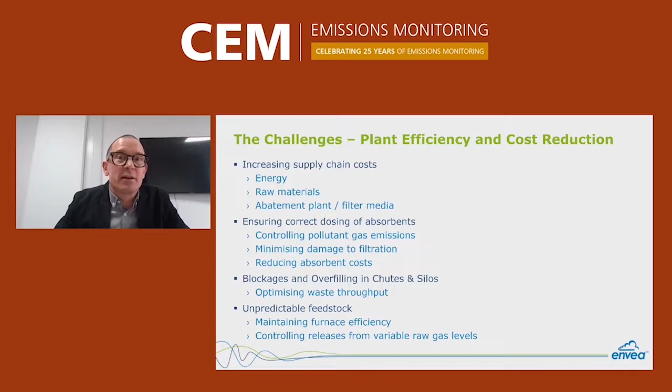And that includes materials used for the pollution control in the waste incineration sector, such as the sorbent materials that are used to help minimise some of the emissions, and filter media costs. And the routine challenges that the process operator faces, such as being able to ensure the efficient and smooth operation of the facility without any unwanted delays, such as blockages that add costs through direct labour, and also delays in production output, or energy output in this case. Next slide, please.

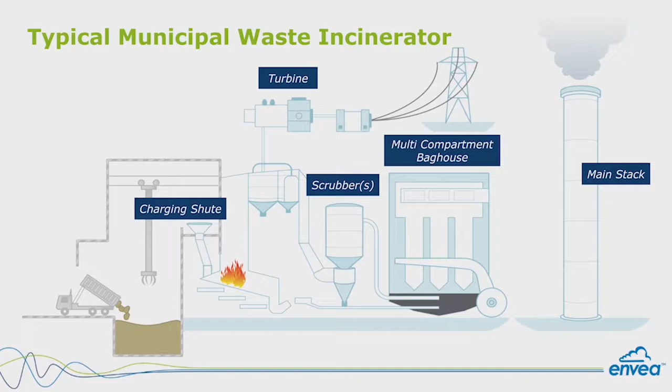To give a very basic overview of a waste incinerator, we have the waste coming in, the combustion process itself. This then drives the turbines to generate the electricity. And from the waste gases that are generated, there are numerous abatement techniques they use. These comprise various dry scrubbers, wet scrubbers, and ultimately the final emission, typically a fabric filter, a baghouse, which is used to get the emission limits right down to the very, very low levels that are required under the European BREF notes and BATC documents.

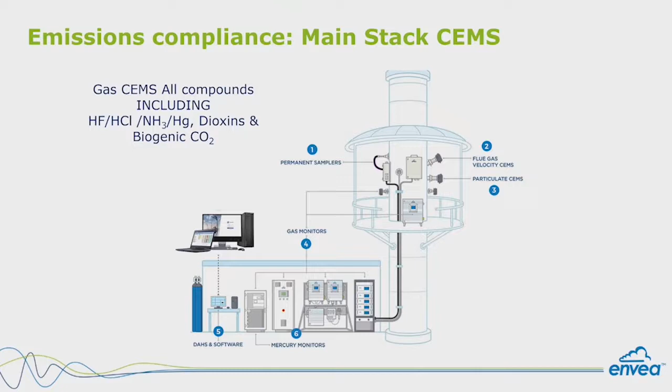Next slide, please. So when we look at the CEMS that are required, it'd be wonderful to go into detail about the complete range of emissions monitoring products that are required to demonstrate their legal compliance. Dust monitors, flow monitors, gas monitors, biogenic CO2 monitoring systems, now mercury, dioxins, and ultimately the need for appropriate software and data acquisition systems to be able to do the required reporting. That's just a simple overview of what's required on their routine environmental compliance side with regard to their stack emissions. Next slide, please.

But what I want to do here is not to focus on the emissions monitors themselves, but actually how we can introduce certain process monitoring tools to help achieve a better environmental outcome in terms of potentially the emission levels themselves, and also raw material costs. Next slide, please.

This is a very simple overview of just some of the products that we consider here. We can consider in terms of process monitoring to achieve certain efficiencies. We would not have the time in this short 15-minute session to be able to go into each of them in detail, but we can go from baghouse filter monitoring, level detection to ensure no blockages, flow detection, raw gas monitoring to ensure combustion control, and in-process gas monitoring as well.

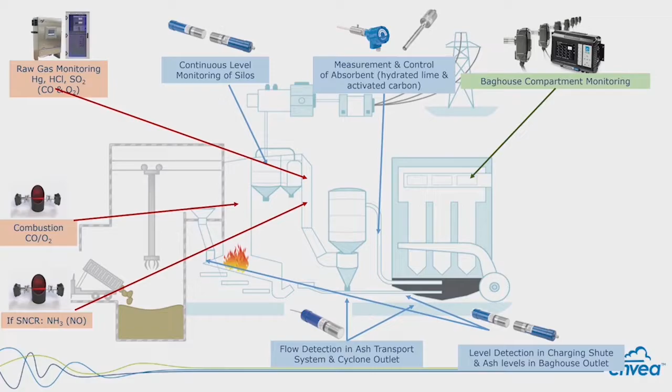But for the purposes of the case study, we can't look into all of those. So what I'd like to do, next slide please, is to focus on just two aspects here, using mercury monitoring, as it is obviously one of the most toxic pollutants that we see from waste incineration.

One of the key challenges that the process operator has here is the inherent variability of the feedstock, and certainly limited direct control that we can have over that as a feed material, as a fuel source. So what we're looking at doing here, in terms of trying to achieve process monitoring and environmentally beneficial outcomes, is to have monitoring of mercury within the raw gas, straight from the direct combustion, and also to be able to monitor and control the reagents that are used, specifically hydrated lime and activated carbon. Next slide, please.

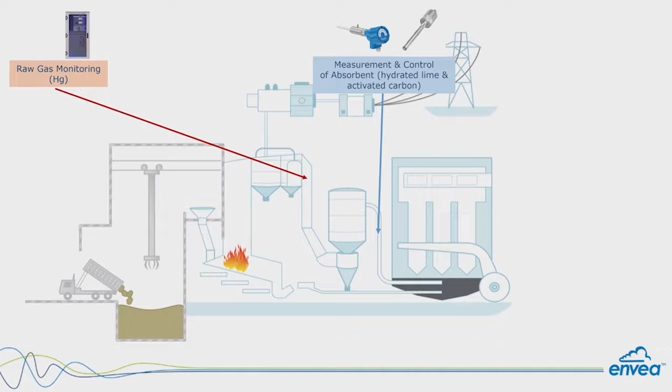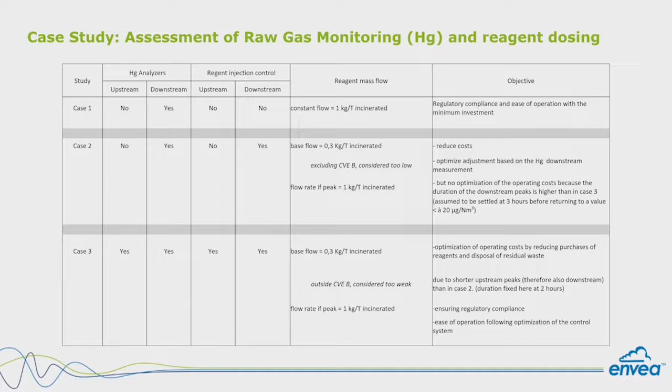So what we've got here is a number of different scenarios. This was a series of tests that were undertaken by my colleagues in France on one of their waste incineration customers. So in the first example, let's call it case one, this is just doing it in the basic way. The norm here is to have a constant stream of dosing applied to the emission stream, with no upstream monitoring whatsoever. Sorry, to go back, in the first case, we're just relying upon the mercury monitoring from the releases, with no reagent control, just a fixed rate.

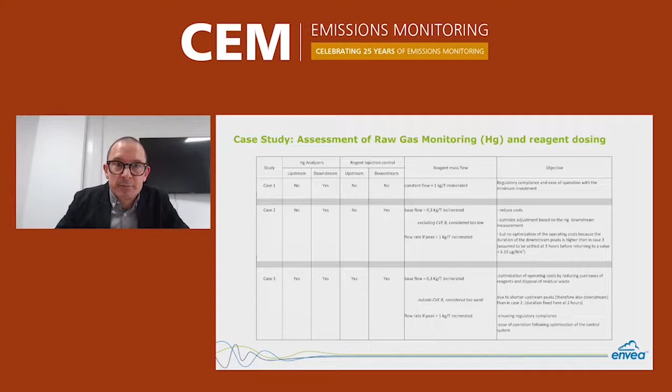So for the second example, we are actually introducing some reagent control in the dosing, but still only relying upon downstream monitoring of the mercury emissions. And then in the third example, we're actually introducing some raw gas monitoring for the mercury, and also upstream and downstream monitoring of the reagent control. So we have a variety of different scenarios here. Next slide, please.

So this is a quick overview of the basic data that's used in this calculation: standard operating terms, detail on how many emission peaks they typically expect to see a day, and the duration of those peaks. It's worth noting here that, unlike some of the gases that we're monitoring, the lag period for mercury is not a short spike that we see in the emissions. It's actually a tailing curve, and these can last several hours.

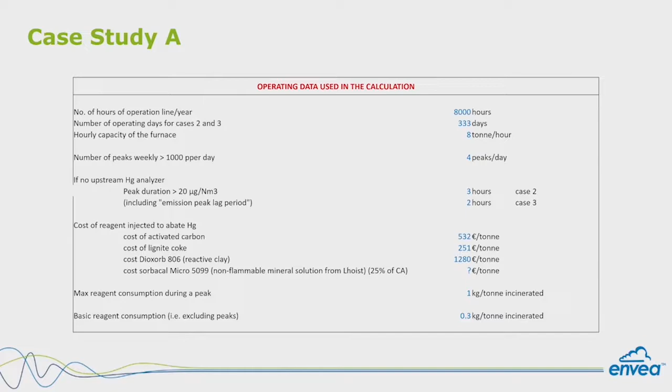And here we've got some indicative costs on the sorbents. Unfortunately, my colleagues were not able to get costs for each and every sorbent, but it gives us a starting point to be able to look at the outcomes from the different scenarios that we'll see. Next slide, please.

So here is the first set of data that we obtained. If we refer back to the cases mentioned, the first one is just a constant flow rate of the reagents with no upstream monitoring. And what we see here is an estimated annual cost of about 34,000 euros a year. It's actually potentially going to be higher these days, but this gives us a baseline for this case study example.

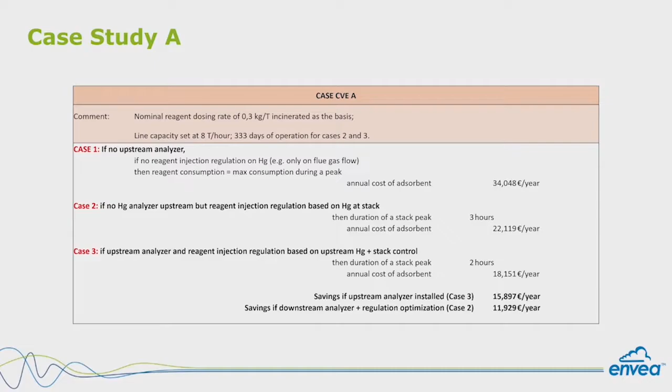So in the second example, when we start to control the reagent introduction based on the stack monitoring and trying to optimize it: when we see a peak, we can add more. When we don't see a peak, we can use less. So actually there, the duration of the peaks are typically lasting up to about 3 hours.

But actually by not applying the fixed rate and starting with a lower base rate, where we've decreased the background sorbent level by about a factor of 3, from 1 kilo per ton incinerated down to 0.3 kilos per ton incinerated, that alone, and upping the dosing only when we detect the peaks in the outputs, has decreased the sorbent cost to about 22,000 euros a year. So a significant saving has already been achieved there.

And then the third example, where we've actually got the raw gas monitoring to give us real-time data on what's directly coming out of the combustion process for the mercury itself, with the reagent control, again keeping that lower level of standard dosing, but increasing the dosing when we see the peaks. That's brought two benefits here.

It's actually decreasing the peaks: instead of them lasting 3 hours, they're now down to 2 hours. And also in turn decreasing the sorbent cost further down to 18,000 euros per year. So that gives us cost savings of between 11 and 15,000 euros a year by this approach in this example. Next slide, please.

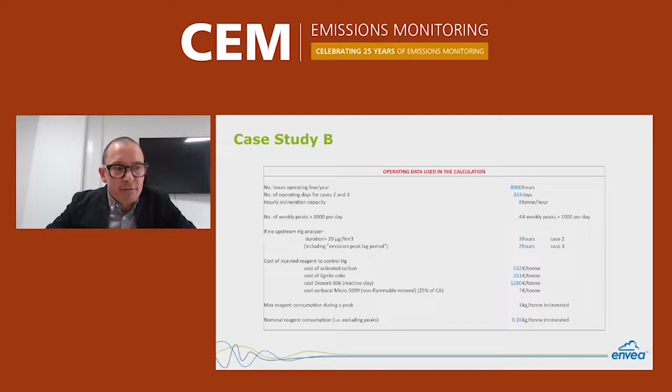In case study B, the key difference that we see, although there was a slight difference in the sorbent mix, the aim here was to decrease the baseline sorbent level down to 0.16 kilos per ton, kilos of sorbent material per ton of waste incinerated. Everything else is essentially the same. Next slide, please.

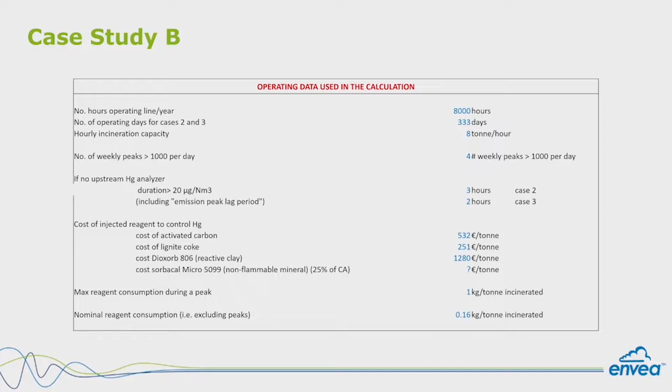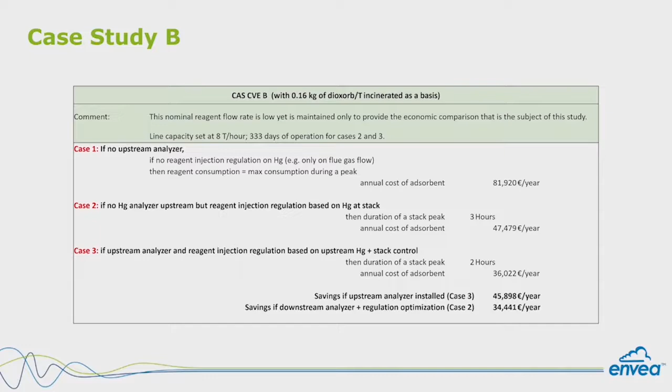So here, the cost of the sorbent, as I said, it's a different sorbent mix, but the baseline start point, with no upstream monitoring and no reagent dosing, in this example was 81,000 euros per year. But then when we move to case study 2, where we're introducing the reagent control, using the CEMS data, the emissions data, to increase the dosing, the peaks themselves are still lasting typically 3 hours, but we've almost halved the reagent costs by getting it down to 47,000 euros per year.

And then for the third and final example of the case study, the optimum, shall we say, where we have upstream the raw gas mercury monitoring, and also the upstream and downstream reagent control for the mercury monitoring. Again, the mercury peak duration is decreasing down to 2 hours typically. And the annual cost of the sorbent is decreased once again, down to 36,000 euros per year.

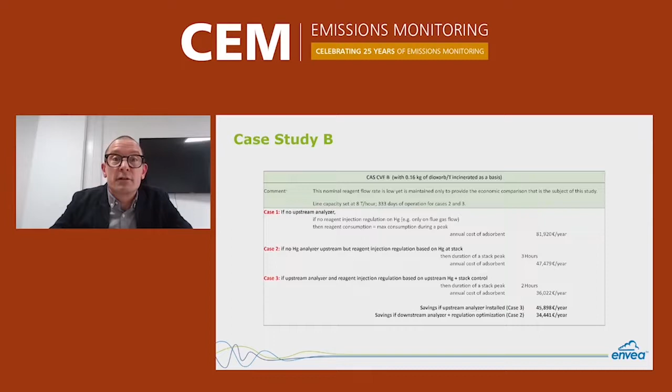So again, we're seeing a significant decrease in the sorbent cost, with the added benefit of actually decreasing the mercury emissions as well, certainly through the duration of the peak. So here, in this case study, the cost savings are between 34 and 45,000 euros per year. So, roughly halving it in round numbers. Next slide, please.

So just to conclude, there was a lot to try and capture in 15 minutes. It's a short time slot. For the waste incineration sector, the general guidance provided to achieve environmental compliance and process efficiency is through the BREF and the BATC documents, the last one introduced in 2019, as mentioned earlier. But in addition, we can focus upstream into the process and bring in further monitoring techniques, such as the raw gas monitoring and the dosing control.

And as we saw through these two case studies, there are several outcomes. We've got reduced sorbent costs, we've got better control of the emission peaks and keeping those down, which further adds to legislative compliance. These give real-time cost savings for the process operator, but also add to ethical stewardship. This is a very positive message the operator can give back to the local community, especially as this can be quite contentious in some areas.

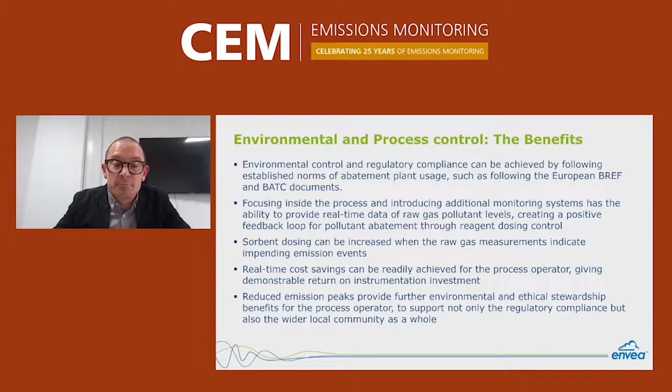So I thank you for your time. Last and final slide. There was a lot for me to get through in 15 minutes, but hopefully you got an insight as to how looking upstream with process monitoring can give some real positive environmental and social benefits back to the waste incinerator and his process. Thank you very much.